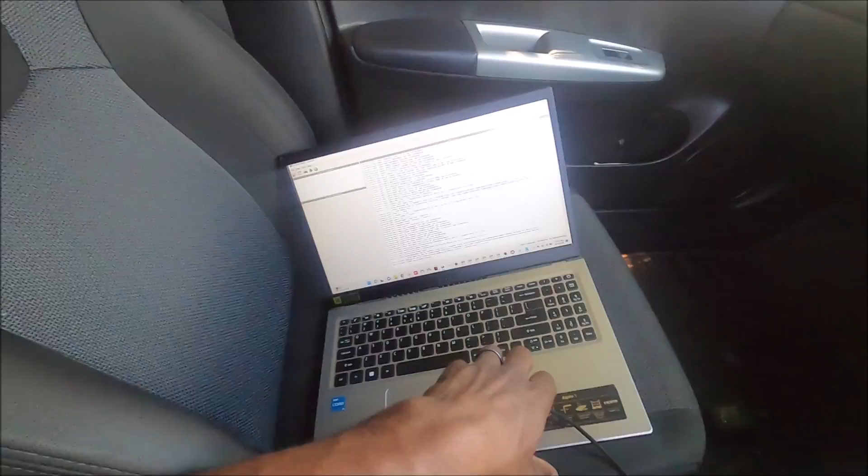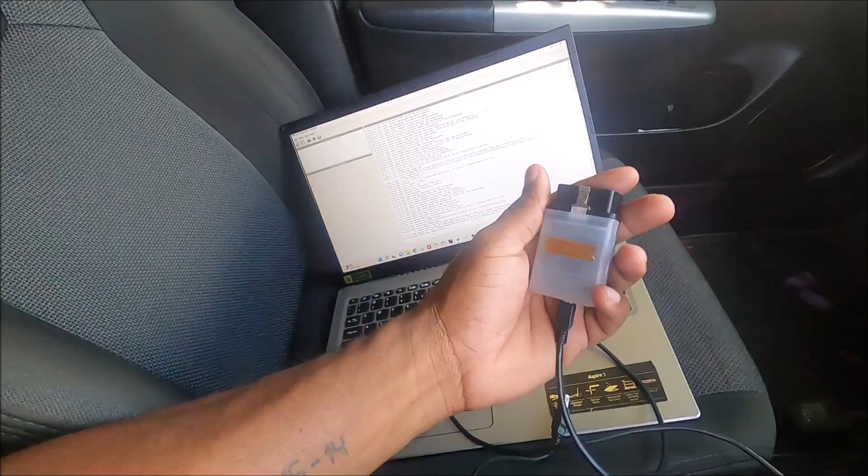Alright, so now that we've covered that, let's take a quick dive into what exactly you need to actually tune a Subaru. If you look here, I have a laptop. Obviously we need a laptop. We also need this guy. It's an OBD2 interface cable, most popularly known as the Tactrix OpenPort 2.0. I think there's a 1.3 which was out a couple of years ago, but for now most of what you would see on the market is the OpenPort 2.0.

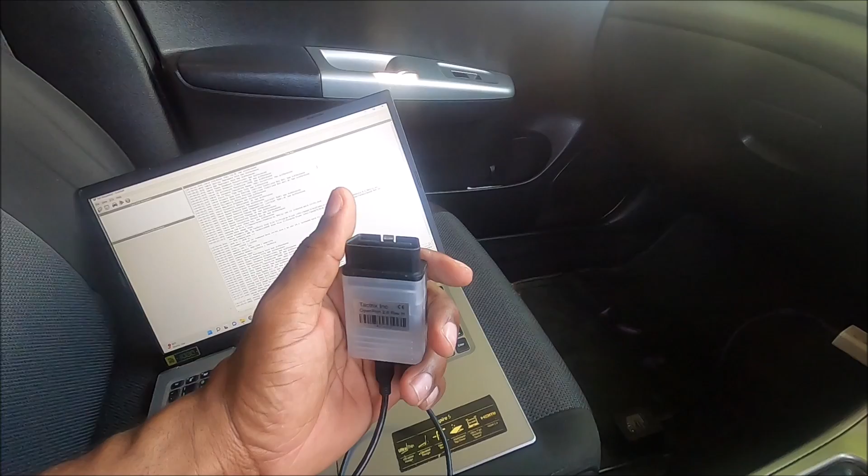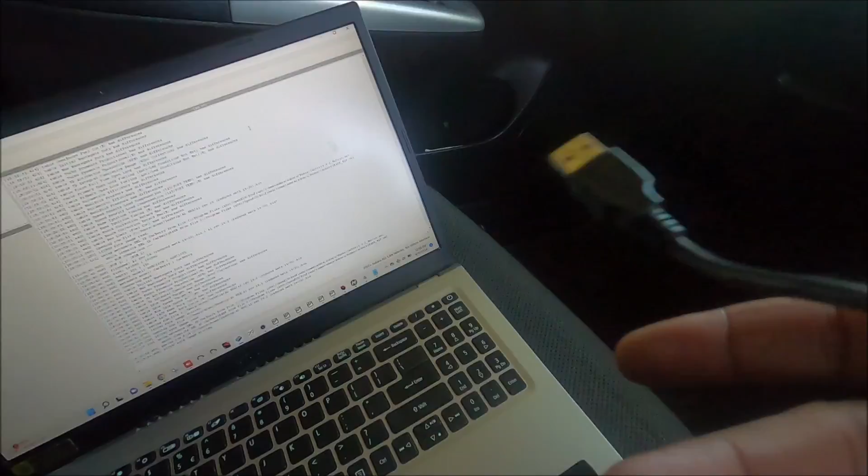So we use this cable with the laptop. This connects to your OBD port, which is typically under your steering column, and with this you're able to read, write, data log, all of this stuff which you need to do on your factory ECU. Alright, so let's get all of that hooked up. So laptop connected to the Tactrix cable via the USB port, and that is under my dash, right?

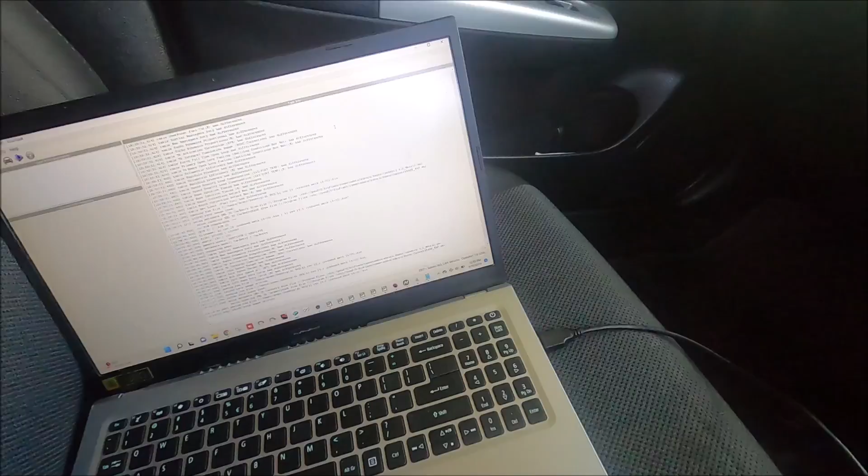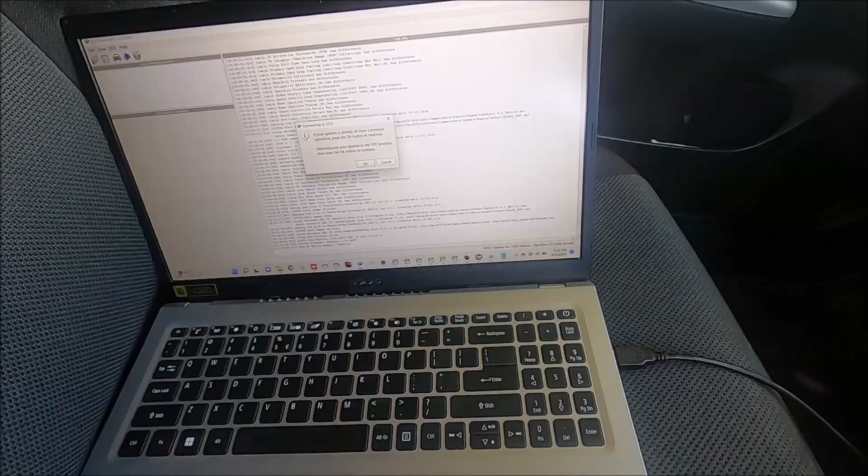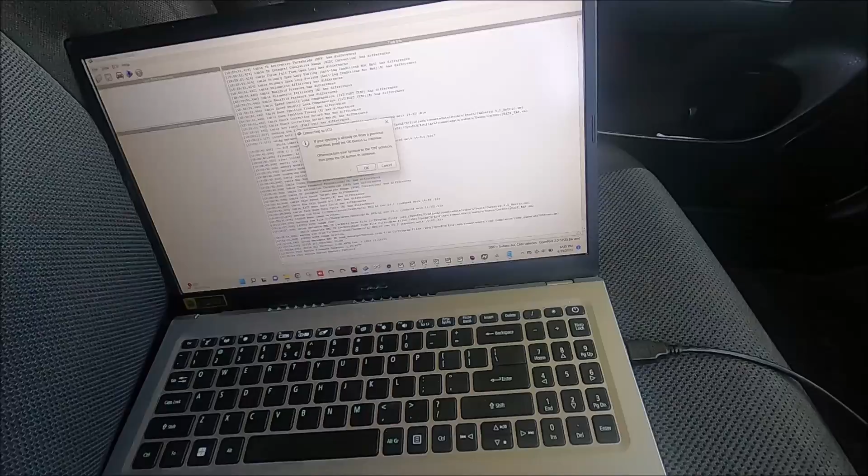And generally what happens is you have to now pull the map out of it. So you hit this blue button. This blue button is just the option you get with the key on. You need to turn your key on, hit OK, and it's just going to pull the factory map out of the car, and we're going to get whatever is stored on there. Hopefully no one has touched the car before you, but there are options online where you can get a stock file in case someone has touched your file, and then you'll hopefully be starting off with a factory calibration on your car.

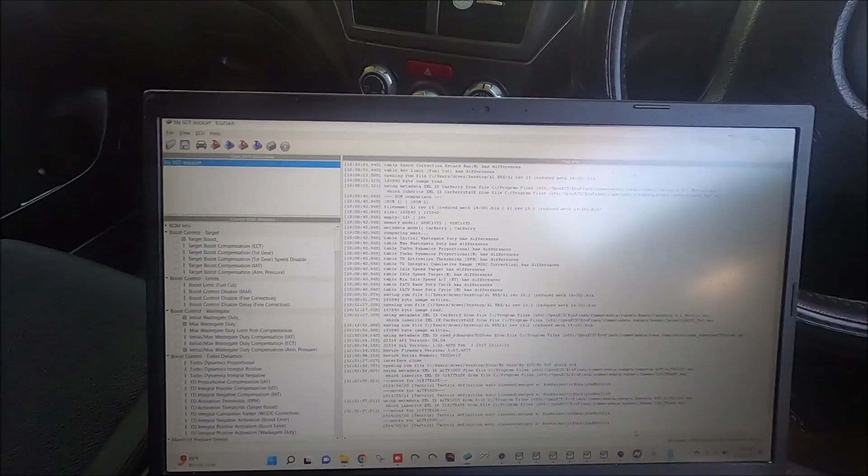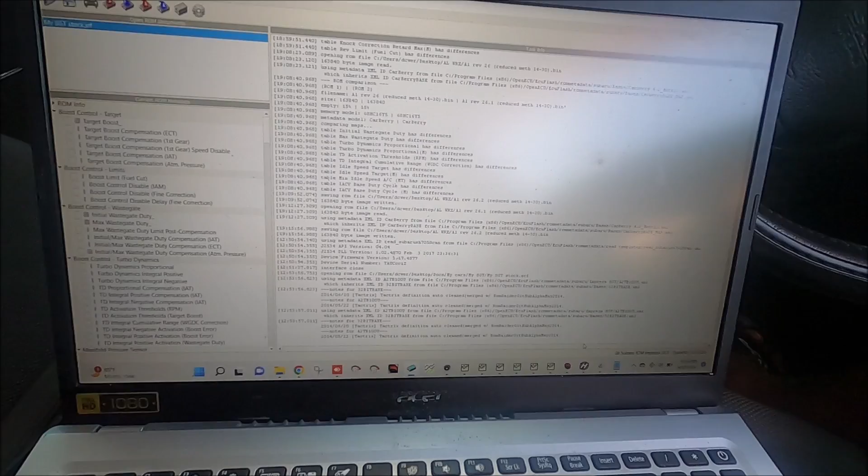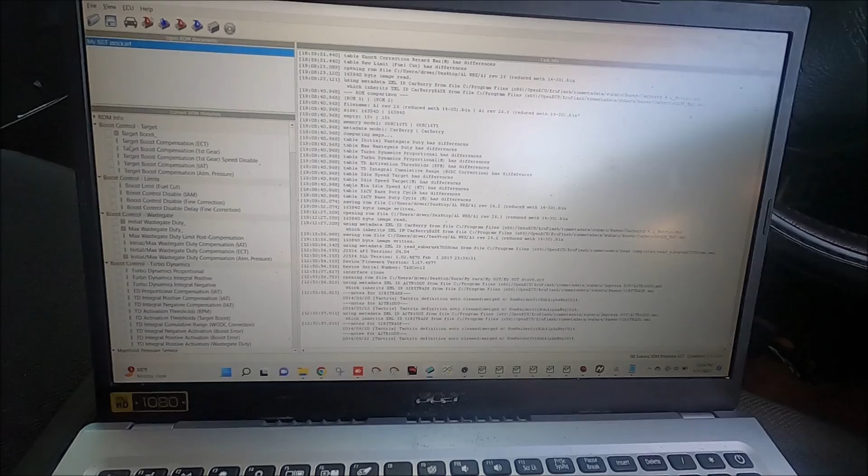Okay, so I'm not sure how well you can see the screen. I'm going to turn up the brightness, and not do some screen capture, because hopefully we're going to make this video as short as possible. So I went ahead and hit this blue arrow, which is the read from ECU flash memory. You do that, key on, and then you save your file, give it whatever name you want. So let's take a look at what exactly is in there and why we need to make changes. This is the raw values of the factory calibration, the stock map that is on my car.

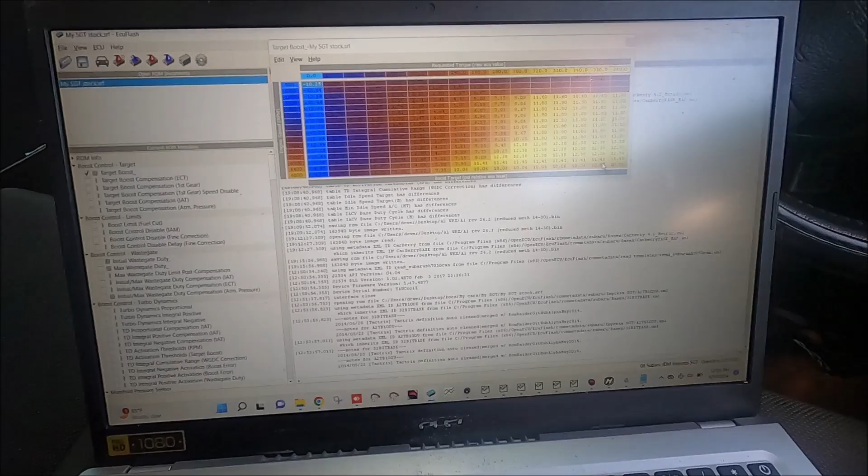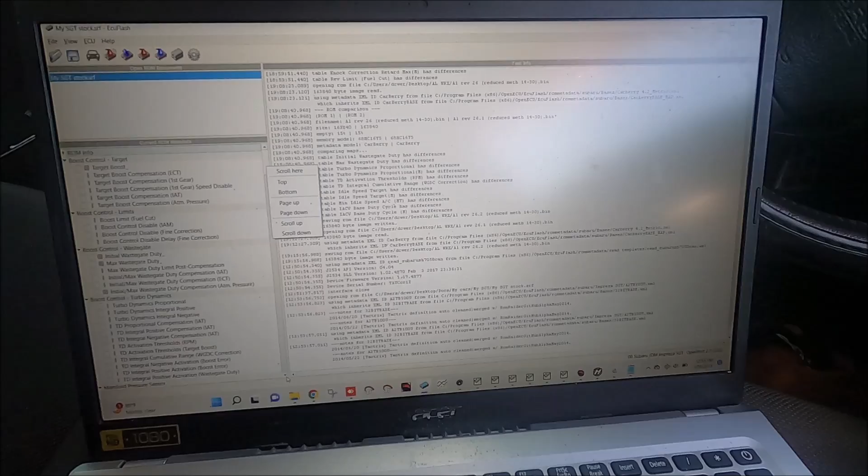So as you can see here, the car for the most part targets about 11.8 pounds of boost in the mid-range, somewhere around 5,000 it targets 12.5, and closer to redline it goes down to 10 pounds of boost. So overall around 12.5 pounds of boost, which is not a lot of boost. So going down here, let me show you the fuel. We'll have our primary target table.

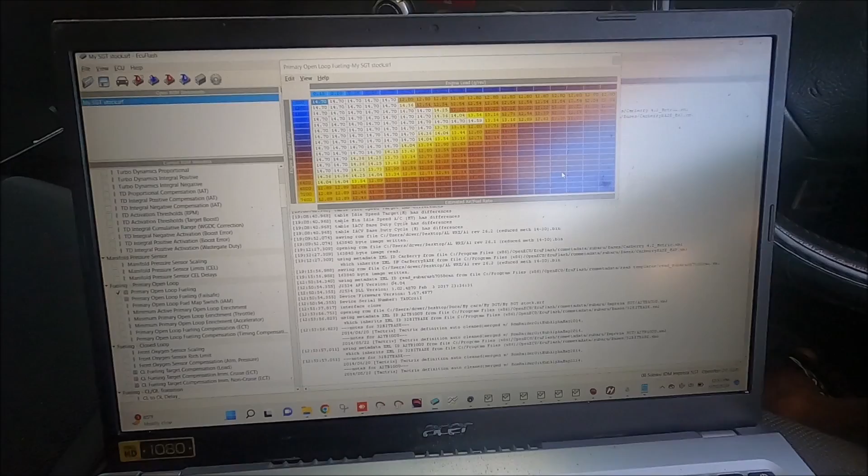Again, this is not a deep dive. I cannot cover everything, every table that you need to learn and whatnot. So we'll just go over just what we need for now. So this table is what Subaru uses to target the air fuel ratio. So whatever air fuel ratio the ECU is commanding from the engine, this is what it's going to be. So typically we're going to be in this range here.

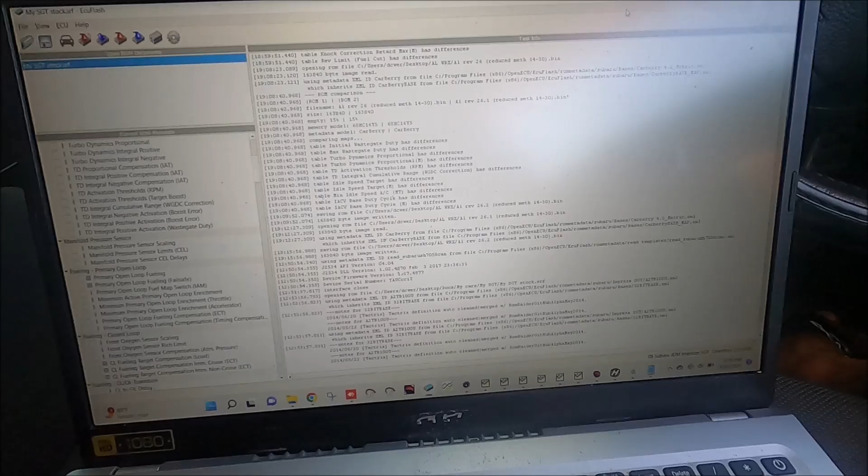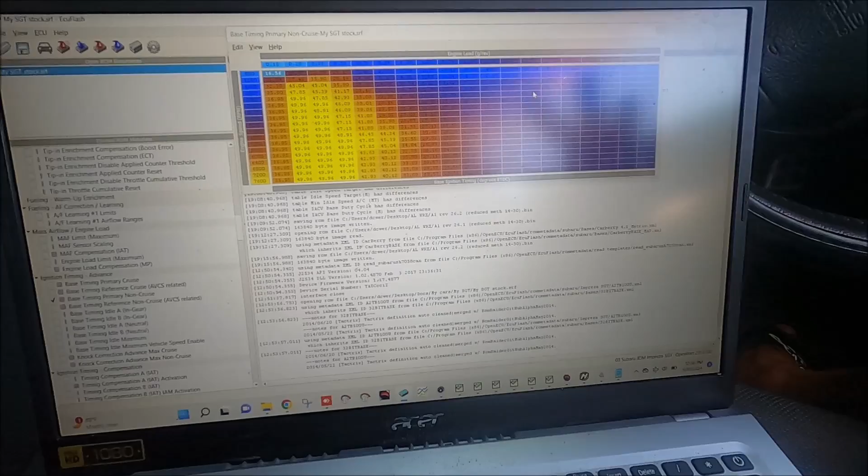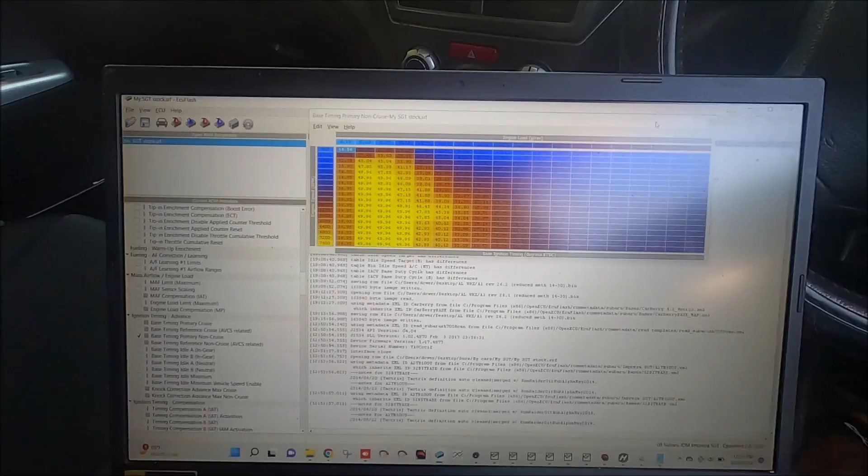So this table. Typically where we would run this car, I've already tuned this car in the past, so I know exactly what it's going to do. But we'll be somewhere around here, 17.9, with an addition of about 5, so call it roughly 22 pounds of boost at the peak load. So what this is, again, it varies from Subaru to Subaru.

This specific car has an EJ20X in it. So what this usually is, is a high compression version of what you would get in most Subarus. Most Subarus would be around low 8s compression ratio. This one has 9.5. So the simple fact that it is higher compression makes it more susceptible to knock. So you have to understand the type of car and the bore size and whatnot. But again, we're gonna make this simple. Gonna leave all of the more technical stuff for another video.

So understanding that this EJ20X, commonly found on eBay as a replacement motor, guys throw it into their cars when they have a failure because it's cheap. For me, however, my EJ20X came factory on my car. My car is a Subaru SGT. So taking into consideration that we have high compression, we need to tune this car so that it runs on our pump fuel. Locally, it ranges from 90 octane for you American guys to like 91, so what the Europeans would call 95 RON. This car from factory will knock.

So it's very simple how we get to tune this car. This car has a MAF sensor. All of the fuel and the timing calculations are done based on what the MAF sensor does. I have seen videos where people just totally skip that, but this is by far the most important sensor that you need to tune on these cars.

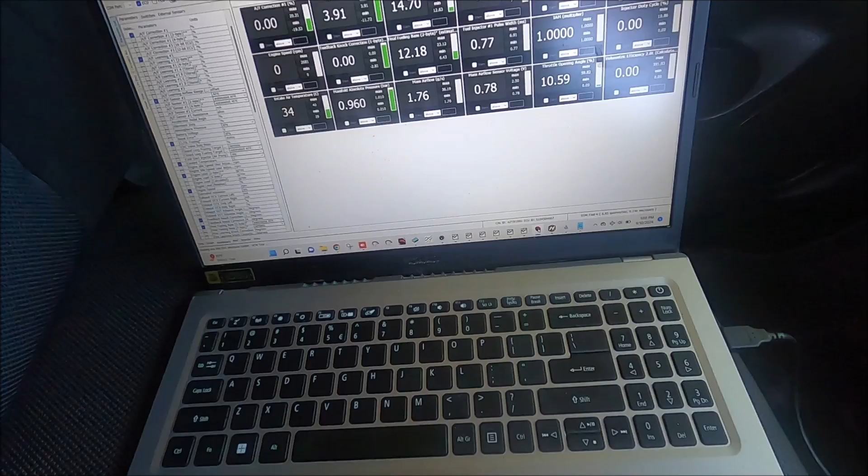This one is called RomRaider. So with RomRaider, you can choose what you need to log. Again, there are many videos up there about RomRaider. I'll also put up a link to one of what I made.

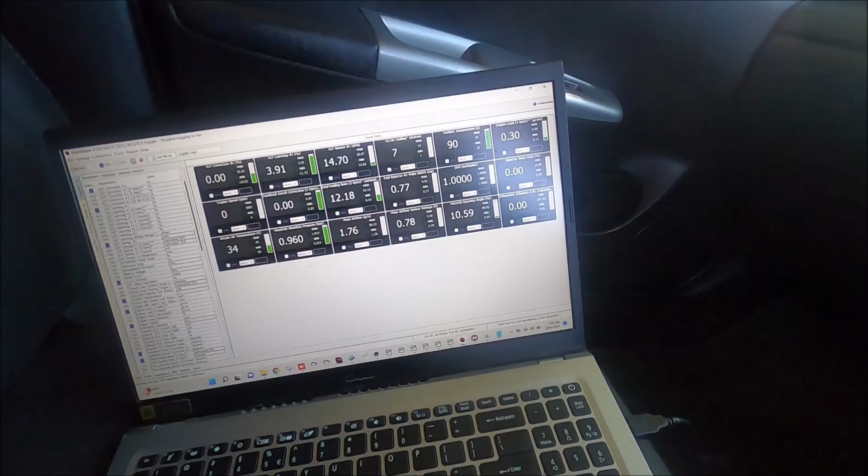So with this, we can log every single setting that the stock ECU is seeing. Air fuel ratio corrections, actual AFRs, coolant temp, load, throttle position, boost pressure, ignition timing, etc. So I'm just going to be logging what is necessary for the MAF sensor. We're going to do that, and then we're going to move on to some more stuff after that.

Alright, so as you can see, I am on an old airport runway. It's a little bit bumpy here, and what I will be doing, there are certain areas of the map that we use, again low RPMs for now, and I'm just basically logging and capturing data so that I use that to rescale the MAF sensor.

So the MAF sensor from factory is very important. So basically, with a properly scaled map, if the ECU knows the amount of air that's entering the engine, then all it simply has to do is: I know the amount of air entering the engine, I know how much fuel my injectors are going to inject. So it's a very simple process for it to actually inject the correct amount. So you just tell it, okay, I need this amount of fuel for this amount of air, and it does the math.

So when Subaru build the MAF scaling from factory, it's not exactly accurate, it's close. Alright, so let's just turn around, still capturing data, again just cruising around. So what I usually see is at low RPMs the cars are generally a little bit too rich. Typically what I see on a Subaru is around 7 to about 12% too rich around idle. Somewhere in the mid-range or low load, it'll be usually around 7% off, and usually in the top I see about 10% being off.

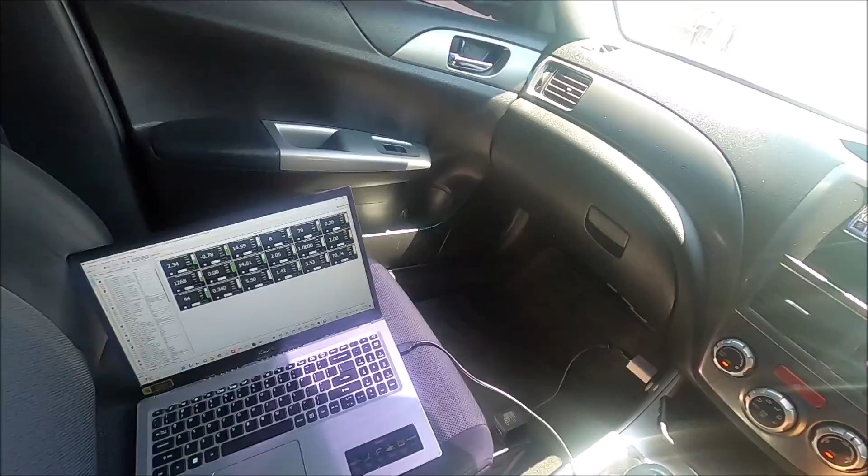So again, just capturing data. I'm just capturing all the data that I need to tune the MAF sensor. So when I'm done with the MAF sensor, then we'll move into some other stuff. So as you can see here, hopefully I can turn and you can capture it. So the RomRaider is running. Again, you don't need to do anything. I'm just logging and RomRaider is doing its thing. When I'm done, I simply stop the log.

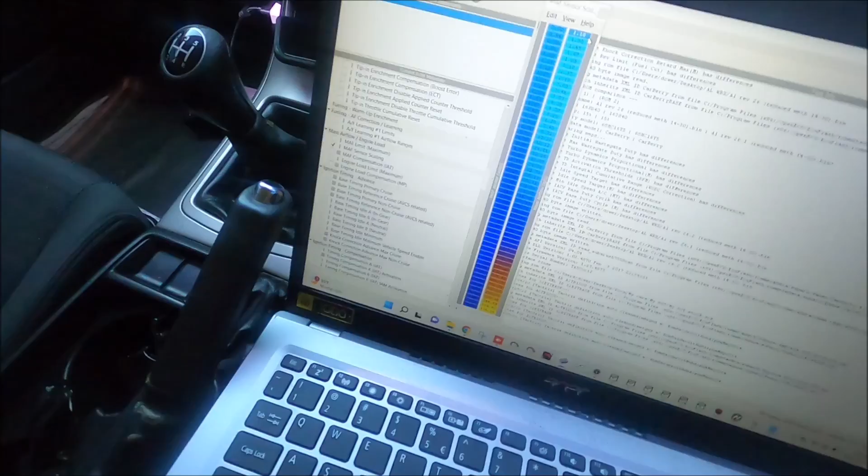Alright, so I've already captured all the data I needed to do the initial rounds of the MAF scaling. So we're gonna do that. Okay, this is what the MAF scaling menu looks like. On one axis we have the MAF sensor voltage, and on the other one we have the airflow. So again, we're basically just calibrating this.

And after I'm done that, I'm going to then do the load comp table and some others, I'm gonna get my timing in the ballpark, and then I'm going to move on to the fun stuff, which is the wide open throttle pulls. And I'm not gonna let you go through all of this process, but I'll just show you a couple clips here or there, and then we'll wrap up this video hopefully in one go, maybe two. But all right, so I'm still driving around capturing data.

Again, it's going to be an iterative process. By iterative, I mean you're not going to get it right in one go. So I've done a couple revisions to the MAF scaling. I've done a bunch of other tables, the load comp and whatnot. Again, the load comp is a very important table. A lot of people don't touch it, but these cars typically have a fuel stumble between like 2,000 to around 3,500, varies from car to car, but generally in that region.

And Subaru never fixed it out of the factory. You can fix it with hardware parts, but they chose to do a software fix for it, which helps, but doesn't take care of the problem. So we need to tune that table, also called the load comp table. I already began adjusting that, all part of me just driving around capturing data, but that is already done. So it's an iterative process. You're not gonna get it in one go.

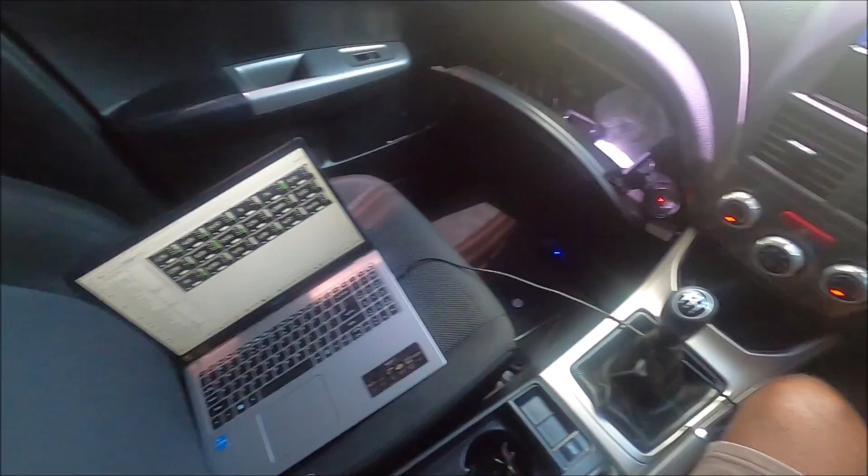Alright, so make sure we're still logging. Alright, nothing else disconnected. So as you can see here, we have a positive 2.3 correction and a negative 1.5, so that works out to be roughly 1%. So we'll get back to that.

So what the fuel trims are is that the ECU has a target. So say it's targeting 14.7, and it also has a wideband sensor. So the wideband sensor and oxygen sensor is what's measuring the actual AFRs of the car. And if for whatever reason it sees that there's a discrepancy, the ECU is in closed loop, it adds or removes fuel to try and get the actual AFR being measured to match the target. And the difference between that is what we call fuel trims.

Some people fall into the trouble trying to get the trims at 0. That is almost impossible because you'll tune it today, and the weather is going to change tomorrow, temperature, humidity, elevation, so it's always going to be moving around. Industry standard is usually people aim for 5 to 10%. I think that is a little bit too much slack in there, for lack of a better term. I personally aim for about 3%. You'd appreciate that your car being off by 7% is enough to change your AFR reading a full point. So the difference between like a 12.0 AFR and a 13.0, or 13.0 and a 14.0 is 7%. So I usually go for half of that, at most about 3%.

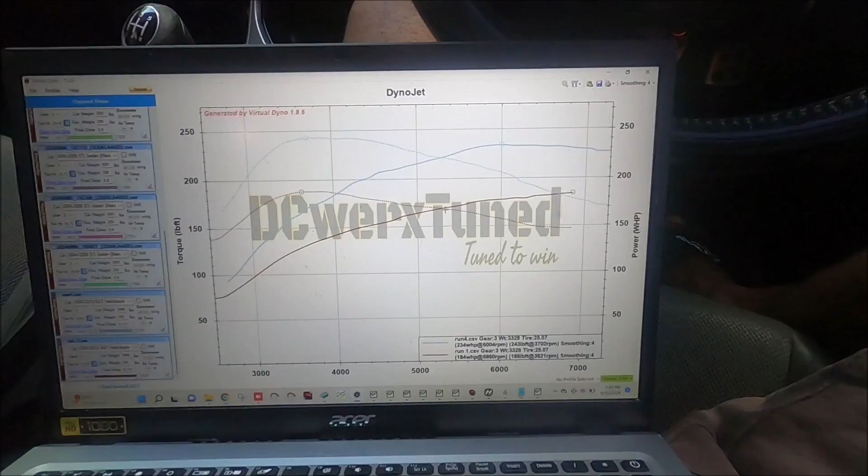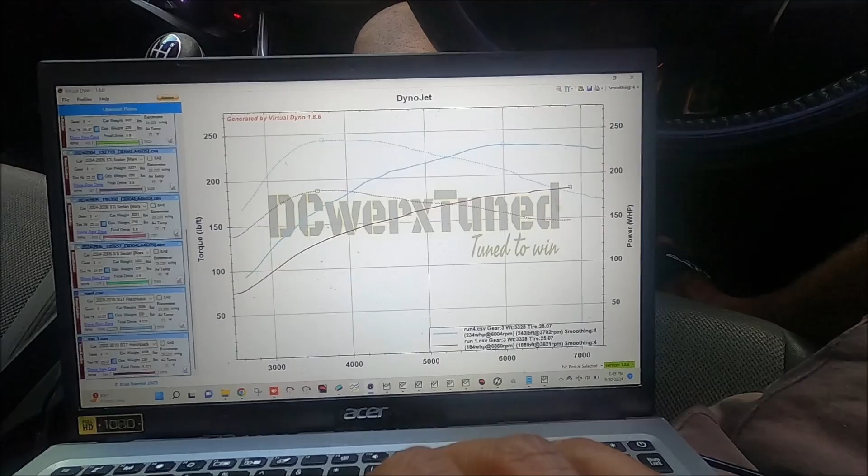All right, so on the screen here I have the two runs. In the burgundy, we have the stock run, so we saw a peak of around 184 at 6800 RPM, around 188 pound-feet of torque. So again, all of this is right in line with what the factory advertises at 250 roughly. And with just the quick remap that we did, we went up to around 235 or 234 wheel, sorry, and 243 pound-feet of torque.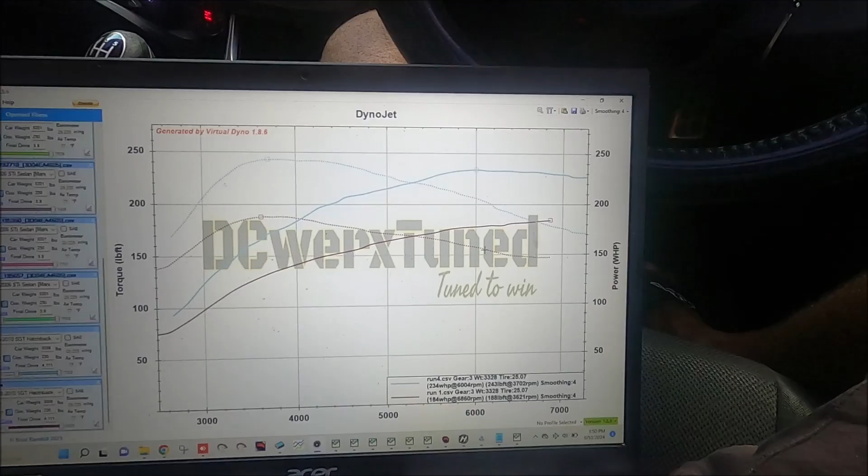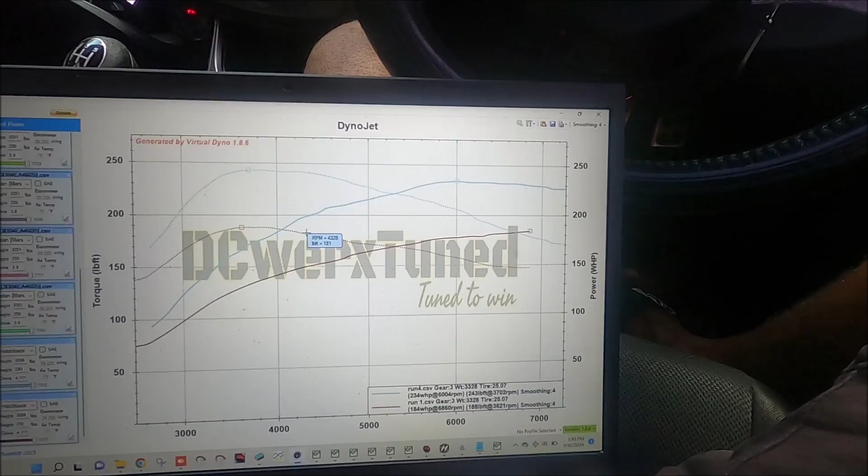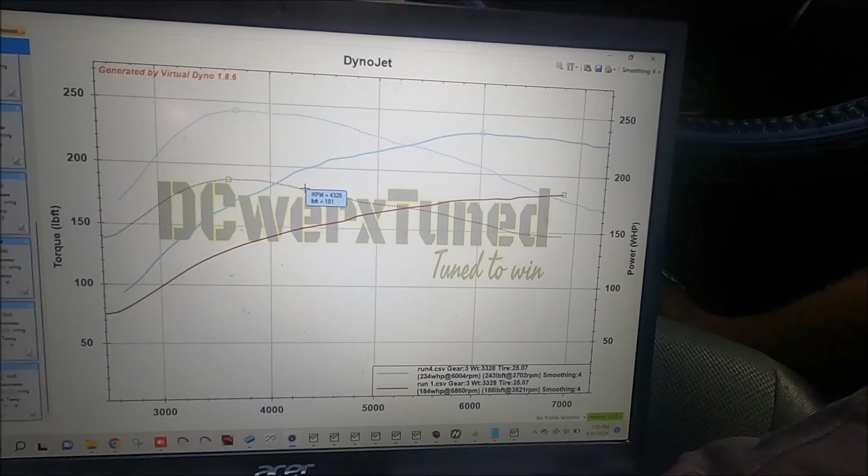So pretty much same boost and whatnot. Well, boost is up by about a pound and a half. We picked up, let me see my math, roughly 50 wheel and roughly 50 pound-feet of torque. All of that is on a completely stock engine, as in stock turbo, stock boost control. The only thing is that this car has been decatted. That's the only mod that has been done to it.

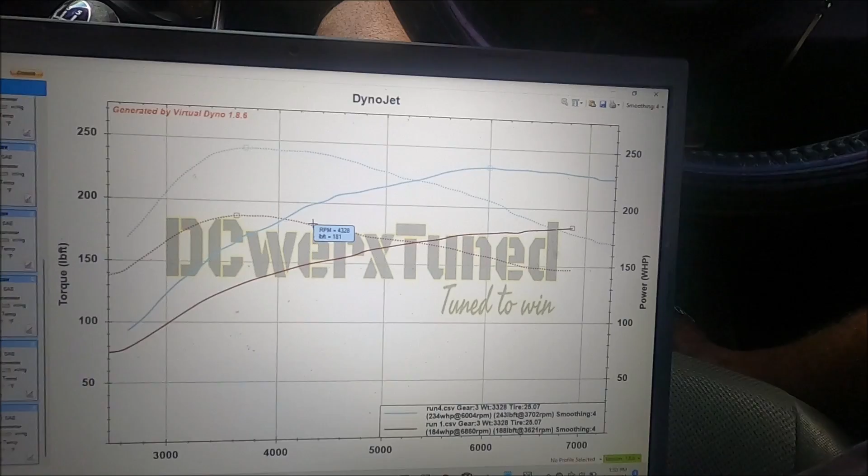So well within the range of what I consider healthy gains for a stock car. Again, virtual dyno number, so take it with a grain of salt, but as long as it's consistent, that's what is important. So roughly 50 wheel and 50 pound-feet of torque. So again, I'm gonna wrap this up.